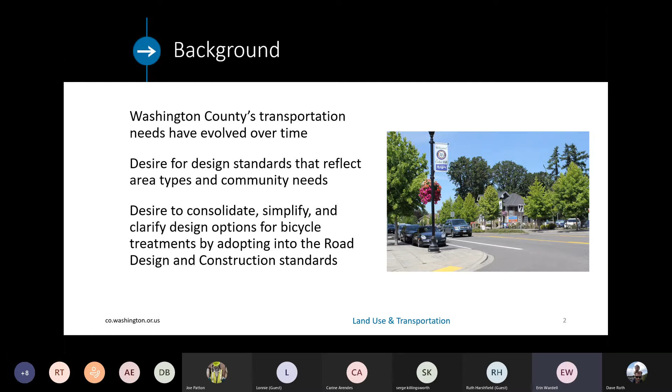This is a project we've had in mind for a number of years. I know the City of Tigard has done really great work on Complete Streets, so you're a bit ahead of us, but this is something the county has had in mind too. Our transportation needs have evolved, and we wanted design standards reflecting the different types of communities we've built. We also had different documents providing guidance for what roads should look like, but those weren't actually adopted into the standards, which made things confusing when building a project or working with a developer. So we saw this as an opportunity to consolidate and simplify guidance, specifically for bicycle treatments, by adopting it directly into the standards.

The objectives for this work were to develop design standards that implement our transportation system policies and reflect these different types of communities and road users, the fact that community expectations for roads have changed over time, to reflect multimodal throughput, and to implement flexibility in design speeds and lane widths to respond to different needs and community types.

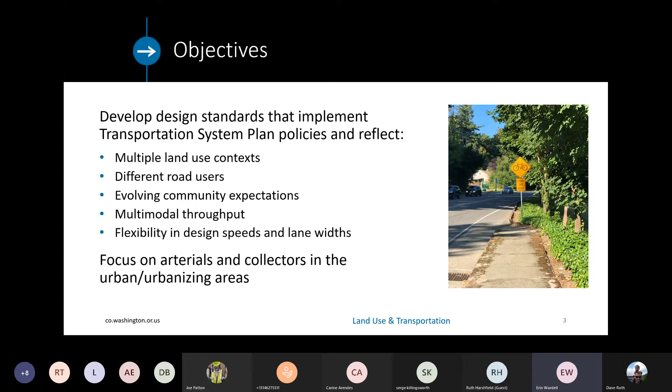For this particular effort, we focused on arterials and collectors in the urban and urbanizing areas. We have lower classification streets as well, and of course a really large rural area with rural facilities, but our design standards work did not focus on those for right now.

I wanted to start with a few definitions, some of which you're probably familiar with. The first is: what are complete streets? Complete streets are roadways designed to provide safe, accessible travel for everyone. All types of travel are equitably supported: vehicles, pedestrians, bicycles, wheelchairs, and public transportation.

When we started this project, we just called it the Road Design Standards Update, but that title didn't really get across what we were trying to do. So we rebranded it as the Complete Streets Design Update.

The next definition is road design and construction standards, the document that establishes the technical engineering, design, and construction requirements for public road and bridge improvements under Washington County's jurisdiction. The City of Tigard and all jurisdictions have a similar document.

Our transportation system plan is an element of the county's comprehensive plan. It's our 20-year vision for our transportation system, outlining projects, programs, and policies to meet our needs now and in the future. Tigard, of course, has their own TSP as well.

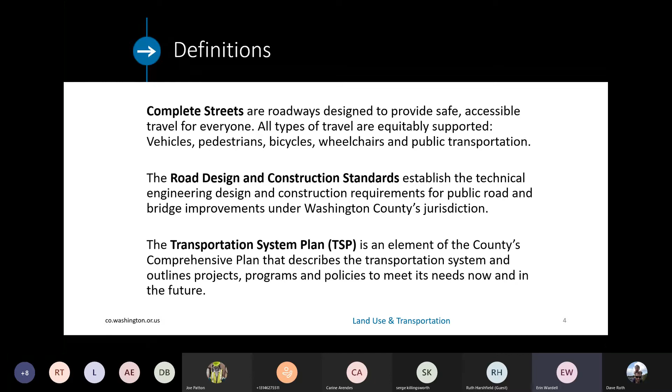For Tigard's interests, a couple of the facilities these new standards would apply to would be Scholls Ferry, Beef Bend, Roy Rogers, Roshak, and Bull Mountain, among a handful of others. Just to give you an idea of which roads we're talking about: we don't have design authority over roads under Tigard's jurisdiction, nor do we have authority over roads under ODOT's jurisdiction.

This next slide goes over some of the enabling language in our transportation system plan. When we updated the TSP most recently in 2014, we adopted some really good strategy language around complete streets. Generally, these strategies address planning, engineering, designing, and constructing a transportation system that promotes safety and provides multimodal function. We will separate travel modes and minimize conflicts where possible, prioritize enhanced complete street and boulevard designs particularly in town center areas, and consider all abilities and travel options when planning, designing, and implementing transportation improvements.

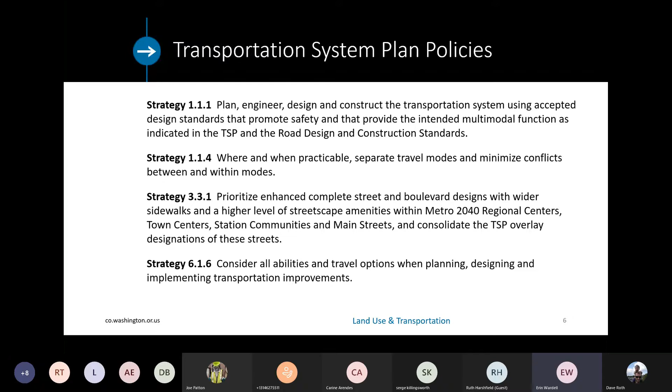For the first phase of the project, we did an audit of our existing documents. We looked at comparable jurisdictions' documents and started to think about where we could possibly make improvements. We then developed policy frameworks and process frameworks that we reviewed, and now we're moving into the phase of looking at draft updated road standards.

We're aiming for board adoption later this spring, possibly early summer. Right now, we have it tentatively scheduled for May.

Our targeted stakeholder engagement throughout the process has included external partners, but has been primarily focused on our internal county partners, because all teams within land use and transportation use the road design and construction standards. We've had regular coordination meetings across the different divisions and working groups to make sure we all understand what we're trying to accomplish with this update.

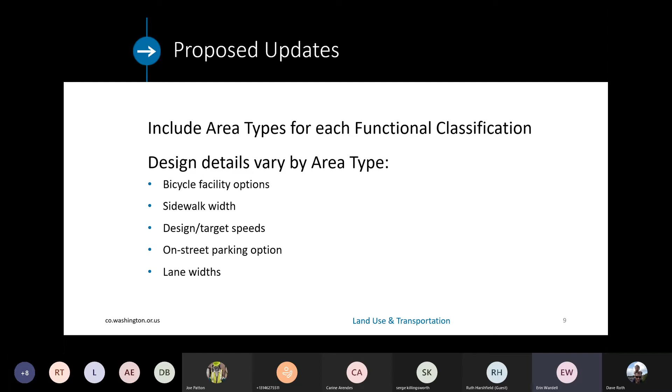Jumping into what the actual proposed updates are, the first is to include area types for each roadway functional classification, and then have design details that vary by those area types. The details that would vary include bicycle facility options, sidewalk widths, design/target speeds, whether on-street parking is an option, and lane widths.

We picked 3 different area types. Initially, our consultants suggested 6 or 7 different area types, and we felt like that was splitting hairs a little bit - too detailed, too onerous to really fit parts of the county into that many categories. So we settled on 3.

The first is town center, main street, or station area. These are areas that are pedestrian friendly, with lots of commercial and residential activity. People are using a lot of different modes in these areas - you'll see people crossing the street, riding bikes, and also driving.

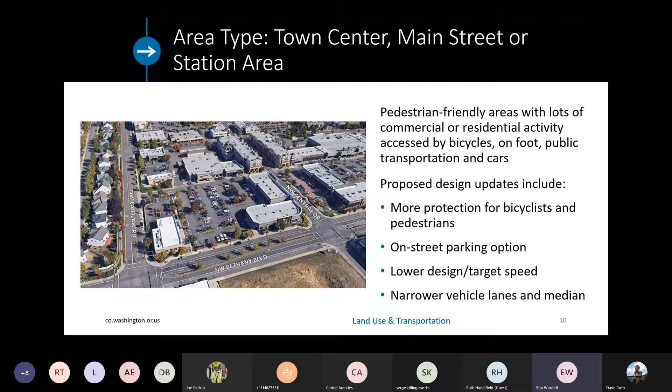Our proposed design updates for the town center, main street, station areas would include more protection for bicyclists and pedestrians. Reflecting the commercial nature of these areas, we would have on-street parking as an option - in our current standards, on-street parking is not an option on arterials or collectors. We would also have lower design target speeds and narrower vehicle lanes and medians, again to reflect that lower design target speed and the fact that we have a lot of different modes using these areas.

Our proposed design updates would include still more protection for bicyclists and pedestrians, an on-street parking option for collectors that are within residential neighborhoods only, a lower design target speed again from our current standard, and again narrower vehicle lanes and medians.

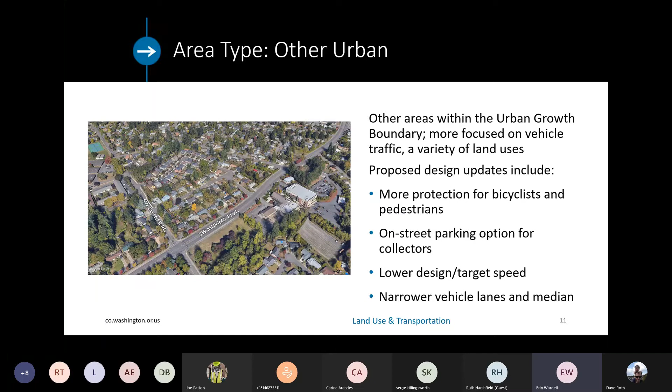Our third area type for the county is rural. Most of the county is actually rural, and so while we have fewer roadways in the rural area, it is an area type that the county needs to think about a little bit.

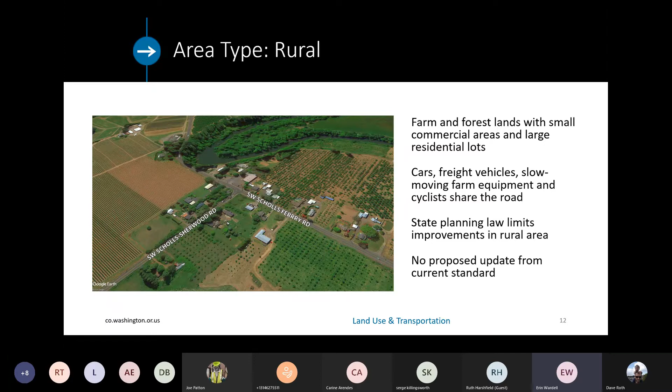We are really restricted by state law in what we can do with transportation facilities in the rural area, so we're pretty limited in the types of improvements we can make, but that doesn't mean it's not something we're thinking about. We have a lot of conflicts in the rural area - cars, freight vehicles, farm equipment, and an increasing number of cyclists sharing the road. But we have no proposed updates at this time from our current standard, given a lot of those limitations. So it's something we're thinking about, but not included in this proposal.

So this slide is showing our existing cross-section for an arterial roadway. This is showing rural or interim on the left, and an urban cross-section on the right side. There's no differentiation by area type. This is just the arterial standard in Washington County.

We have a 45-mile-an-hour design speed, a 6-foot bike lane with no protective treatments other than a single stripe, 5-foot sidewalk, 12-foot vehicle lanes, 14-foot median, and on-street parking is not allowed.

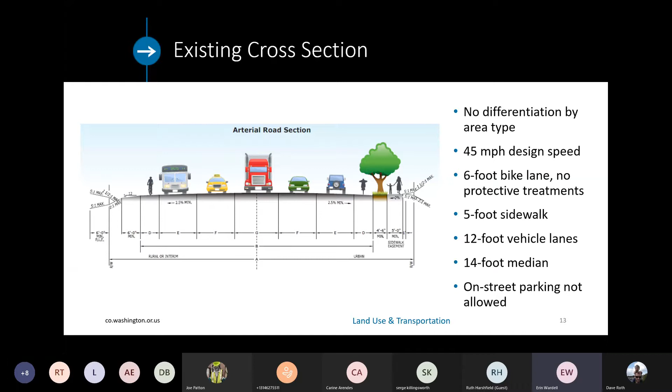Now, I do want to point out there's a lot of county roads that don't look like this. They've had differences incorporated into their design through the design exceptions process. Oftentimes that leads to a really good result, but we wanted to build in some of that flexibility to the standard so that we're not doing it on a one-on-one basis with a design exception when we know that for certain communities, we want different things than are in this standard.

So this next slide is showing the proposed update. This would be for an arterial roadway going through a town center, main street, or station area. This is showing two different options: one is a 5-lane, in which case there would be no on-street parking, or a 3-lane with an on-street parking option. Again, that would be an option—we wouldn't have to have the on-street parking if it wasn't appropriate for some reason in that particular context.

So updates from the current standard, we would be moving to a 30-mile-an-hour design target speed. The base standard would become a buffered 6.5-foot bike lane with an optional green paint treatment, an 8-foot sidewalk along with a buffer zone for light poles, street furniture, mailboxes, things like that. The vehicular lanes would move to 11 feet with a 13-foot median, and we would have that option for on-street parking.

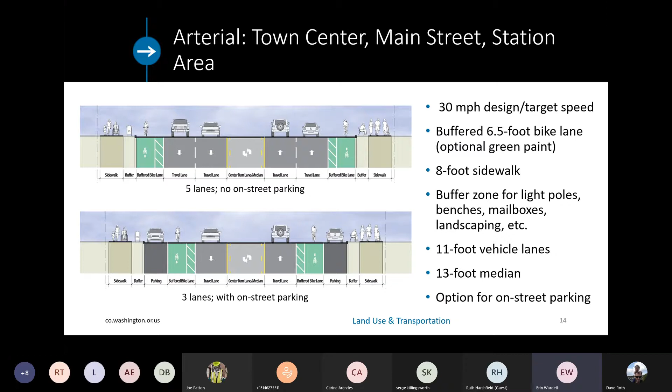So looking at the drawings, this next slide shows the arterial facility in the other urban areas. They don't look that different from each other because it's hard to see that the dimensions are different, but we would have a slightly higher design target speed of 35 miles an hour.

We would have the same base buffered bike lane, a 6-foot sidewalk which is a little bit narrower, still with a buffer zone, 11-foot vehicle lanes which are the same, a wider 14-foot median which reflects the heavier freight use on a lot of these routes, and on-street parking would not be allowed because this is the other urban context, not the commercial area.

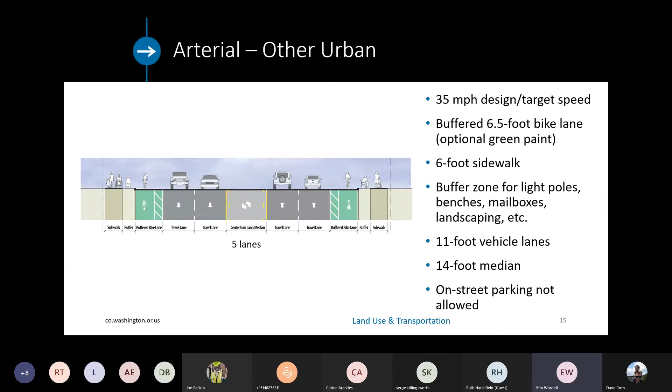So that's a little bit about the arterial facilities. And I want to jump now into what we're thinking with protected bicycle facilities. In the online open house, it went through 8 different options for how we could provide more protection for bicyclists.

While we're considering what would be the base standard, we'd like to include in those cross sections our preferred alternative for higher levels of bike protection. We've found in most of our capital projects that our Board of Commissioners is requesting a higher level of protection, but we're kind of making it up on every project. So we want to have a couple of different options that our capital project managers can go to, or that we can ask developers to build, because we know that's what we're working towards.

So this slide shows 4 different options. Not sure which of these would necessarily be preferred, but that's what we're looking for feedback on—what do people who use the system prefer? And then we're balancing out maintenance and cost and some of the other pros and cons of these different design details. So just know that when we look at those cross sections and see that on-street buffered bike lane, we are also going to be including this higher level of protection based on the results of this engagement we're doing now.

So with that, we have some questions. First, do you agree with the selected area types? Do you think our proposed design updates will achieve these project objectives? What do you think about bicycle protection design options and your experiences with that? This last one I should have updated, because the online open house is not active, but we're still willing to go out and talk to different committees and groups and receive their feedback individually. So if you have ideas for other groups we should be going to, that would be fantastic. And with that, we're open for questions.

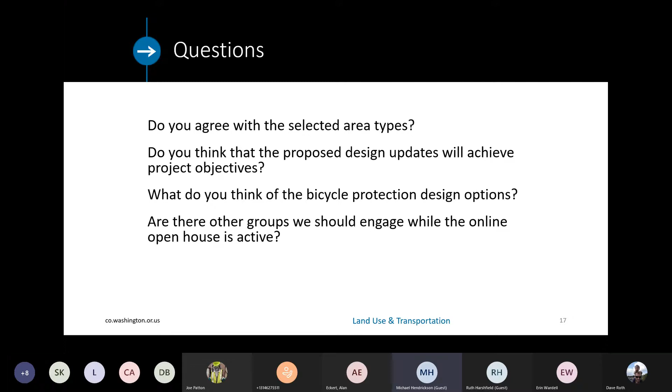Okay, Michael. I just had more of a comment regarding the bicycle protection. The one near the sidewalk, I can see how that would be beneficial. I have a couple of kids who ride bikes with me, and that's beneficial because it's not near traffic. But as an avid cyclist too, I prefer the one near the road.

But also, with the fourth option, I see an issue with those markers potentially getting ruined over time by cars hitting them. I don't know if you guys have experienced issues with bike lane designs like that with the markers.

Yeah, we haven't used the flexi posts in Washington County yet, but I have heard that from other jurisdictions that have used them. And I think Tigard may actually have them in a couple of locations. Am I wrong about that? I thought I saw somewhere in Tigard that had the flexi post.

Yeah, you're right, Erin. We've actually been using the delineators or candlesticks quite a bit over the past few years. And when they're bolted and epoxied to the ground independently of anything else, they do tend to get broken off over time. It's been our experience, but one of the new things we've been trying in a few areas, some of you might have seen this on Grant Street near Tigard Street, is where they're bolted into actual rubber modular curb that's also bolted to the ground, and those seem to be holding up better over time.

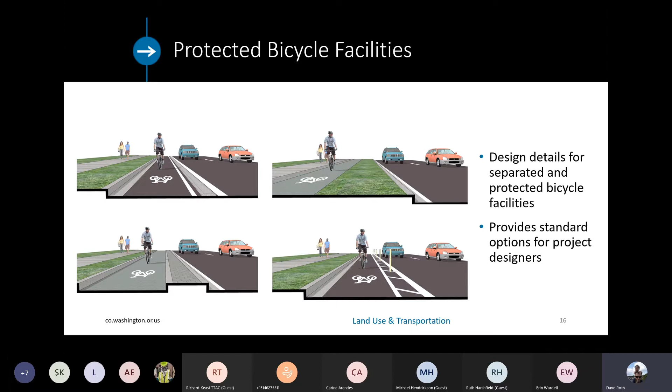Erin, I'm wondering if you could go back to the roadway ownership map for a moment. One of the really neat things about this project is better differentiating between design standards you might apply in more urban areas versus regional town centers or regional centers or town centers. I think an interesting case study for us right now is thinking about Southwest Greenburg Road. It's a county-owned facility between 217 and Hall Boulevard, right in the middle of the Washington Square Regional Center, and we're going through a plan update right now on that process.

And it's a road that Tigard has been thinking a lot about over the past several months, because right now you could pretty easily say that it's deficient for all roadway users. It works pretty well for cars and trucks, but has limited pedestrian facilities, no bike facilities, yet it's a really important connection. I think it's exciting to see that this process might open up new opportunities to rethink the design treatments you'd apply in a place like that.

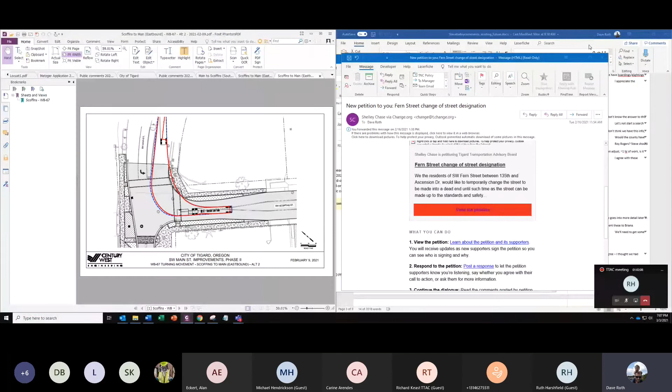There we go. So we had Andy Newberry present to us, I think it was at our last meeting in February, on Main Street, Green Street. One of the questions, I believe it was Lonnie who asked, was whether or not the design treatment at Scoffins and Main was taking into account truck traffic and freight traffic needs in terms of turning radius. And as it turns out, the designers did not use the appropriate turn template. I'll have to retract what I said at the meeting, because I was quite confident that they would have applied the right turning templates. So Lonnie, thanks for flagging that.

You can see on my screen here what a truck turning template looks like when it's applied to a plan view of a roadway. This is the WB-67 design vehicle, which is essentially the largest truck you'll find on our roadways. And apparently this is an area where we see some of these trucks accessing a lot that's behind the Rite Aid and the Value Village.

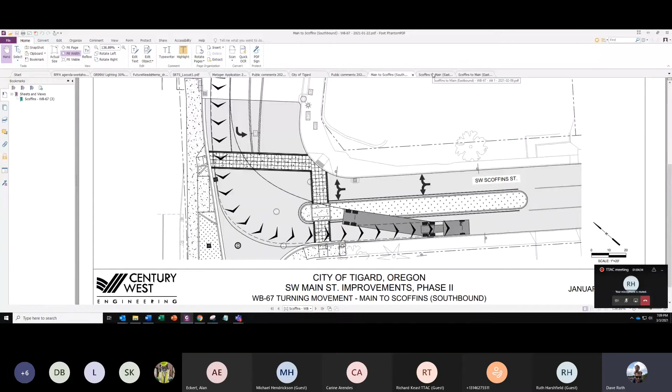So Andy went back to the consultant team and had them run the templates. As it turns out, the design that was initially being proposed, with this median refuge space here, potentially landscaped or hardscaped median, won't work with these trucks making their turns from Main Street onto Scoffins. So the consultant went back and came up with a couple of different alternatives that would work, that still helped accomplish one of our goals, which was to reduce the crossing distance on Scoffins at Main.

So I think this is the one that's preferable from a staff perspective in the design team right now. You can see that the median goes away, but we still get this new large landscaped, potential stormwater treatment area and much larger curb pedestrian zone.

Designed in, but it still allows the truck to execute its turn. And the way that the truck template is applied here is fairly conservative. Trucks and drivers will typically swing out wider, even past this blue dotted line, to execute a turn like this. So I wanted to share that back with the group so you knew what was going on there.

And Lonnie, was that you who made the comment? Yes, I know that the U.S. Postal Service has trucks that go through there, and that's the first thing that came to my mind was, I don't know if they'd make that corner. So, thanks for bringing that up, and this is the result of the conversation.

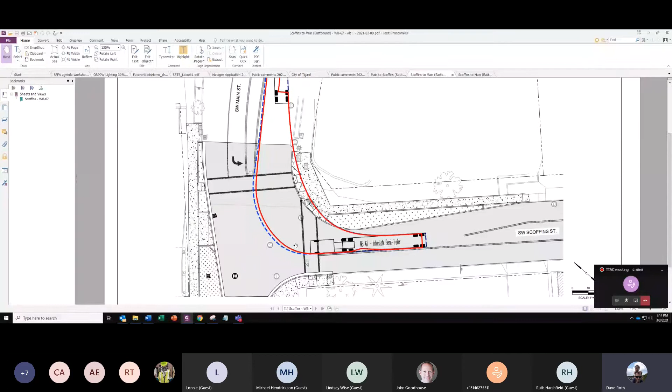Yeah, good reminder for folks. I guess I should speak as well to one of the other concerns, and I don't have a graphic to share on this one right now, but that was at the intersection off the screen here, down on the page. I think Alan and Richard both raised some concerns around the exit driveway of the dry cleaners, and we spent quite a bit of time as staff discussing that, and we're not able to reconfigure the driveways, or more specifically, we're not able to remove that exit lane because it would be too great of an impact on the existing business there.

However, we are talking about some design solutions that we could use to really highlight the potential pedestrian vehicle conflict for drivers exiting the building, and then also to make sure that drivers exiting that building are very channelized, so they can't make turning movements that we would not want them to be making. Likewise, not allowing vehicles to enter that driveway—it would be an exit only. So I wanted to share that with the group as well, and I'm happy to take any feedback that you might have on that.

And if not, I think we can probably move to the next item. All right, the Fern Street update.

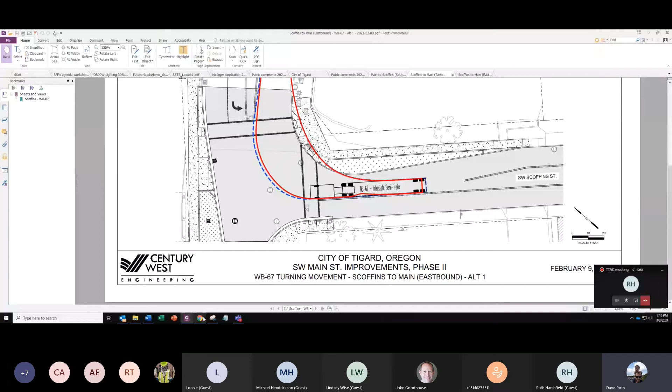So we said we'd come back and give you a little bit of an update on what our plan is, based off of the feedback we received, the street classification, the type of volume we're seeing on the street, the speeds, et cetera. Staff is working on a more detailed response in a memo that we can share with the committee, that will also share with the citizens who've been contacting city staff, and with our elected officials, city council.

So the concern has been raised around increasing traffic, concerns about cut-through traffic on Fern Street, and potential additional traffic based off of some new development that's happening. Given the nature of this street, it's an important connection for the city's transportation network.

Right now this street is seeing somewhere between 700 and 800 vehicles per day, which is a very low number of vehicles for a street of this classification. Perception is important, and the way neighbors perceive traffic on the street is important, but it's also important to base our decision making off of data. Even though traffic might be slightly increasing, it's still very, very low for a street such as this.

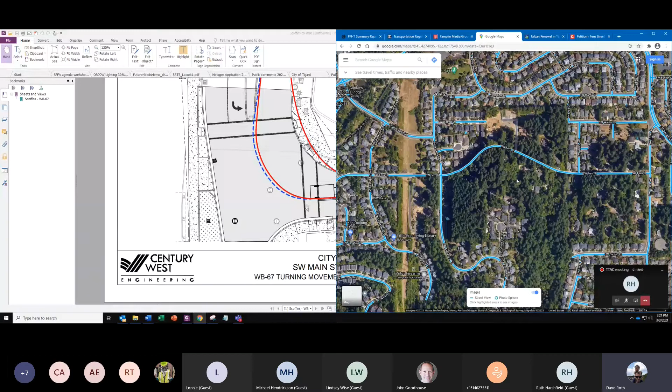So I wanted to share that with the group and acknowledge that we've received some additional feedback, including a petition. I just heard from Carine that the link wasn't working, so I can share this out with the group. There's a petition that Shelley posted on change.org asking for a few things, including changing the street designation and doing a dead end. Neither of those things are viable solutions at this point.

I'd also like to share that I received some feedback from a neighbor who was not in favor of making some of these changes, but would have preferred to see a side path constructed. We talked about that a bit last time, where it would be challenging to build an improved side path on this road because of the topography and the tree coverage there.

So just to wrap this up, you'll see a more formal response shortly from staff, indicating what we will do in the short term, and some details about longer term potential solutions. So with that, I thought I'd open it up for any questions or discussion. And I see George and then Michael.

Hey, Dave, I just had a question. Last time we discussed that, Tegan made a very strong point that we couldn't do anything because it wouldn't be ADA compliant, like grading the shoulder back a little bit, putting some gravel and bark dust. So my question is how did we get away with doing that on North Dakota Street, where the city came and graded the shoulder a little more and added about 18 inches of additional asphalt? If that can be done on North Dakota Street, which is an arterial street, I don't understand why we'd get into ADA compliance issues if we were just to grade the shoulder back 18, 20 inches and put some gravel and bark dust down there.

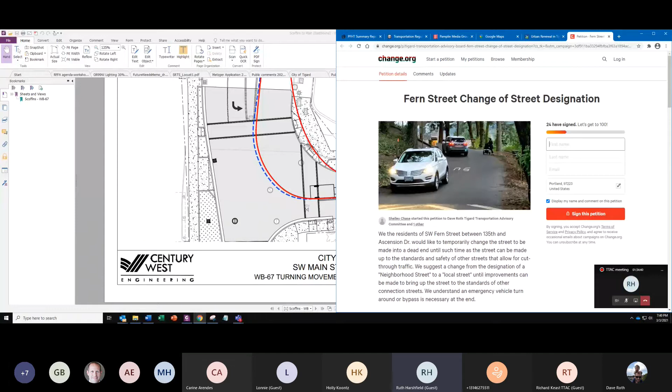Well, thank you everyone for all of your comments and thoughts. We appreciate it. And Dave, thank you for the clarification. So you want to move on? We have been talking about our work plan for this coming year. And I don't know, Dave, if you want to lead that discussion?

Yeah, so let me just fill in the next couple months here of agenda items that we talked about, and then maybe you and Richard can talk more about some of our longer term plans over the year. So next month in April, we will have Susan Shanks, who's a senior land use planner at the city of Tigard, presenting on the Washington Square Regional Center plan update. So that's the project I brought up while Aaron was presenting on the Complete Streets design standards, when I was talking about Greenberg Road.

So this is a really cool project that Susan is doing, and it has significant transportation, I don't want to say impacts, but there's some real different thinking about the transportation needs in this area. So I think it'll be a great opportunity for TTAC to provide some feedback and ask questions.